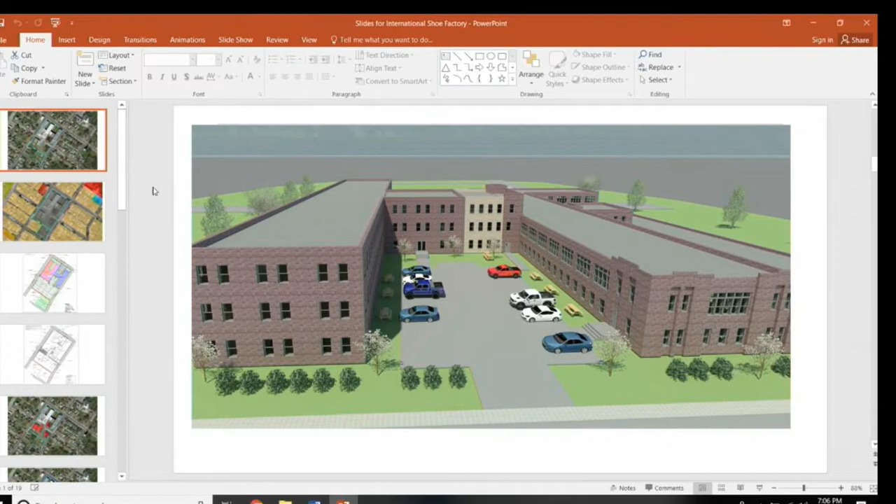I know a lot of you are vaguely familiar with this request now, just because it has gotten a lot of press, and it is a very big project. So this is the rezoning and development plan approval for the International Shoe Factory at 700 West 2nd Street.

It kind of takes up the whole block there in between Rand and Johnson Street and down to Edith. You can see what's not highlighted, 3 homes on that same block, but otherwise it does take up 2 city blocks technically. So the property is still zoned M2 heavy industrial, which has been that way since zoning came into effect, obviously because of the original use.

It has been vacant from what our records can find since 1964. I think the factory closed in '59. They used it for warehousing until about '64, and it's sat vacant ever since.

You can see the surrounding zoning is all R2 overlay, meaning it does allow single and 2-family uses. There is a lot of single-family right around the area, but some of them use it as 2 units as permitted in that zone district, and they are just requesting to rezone these 2 portions.

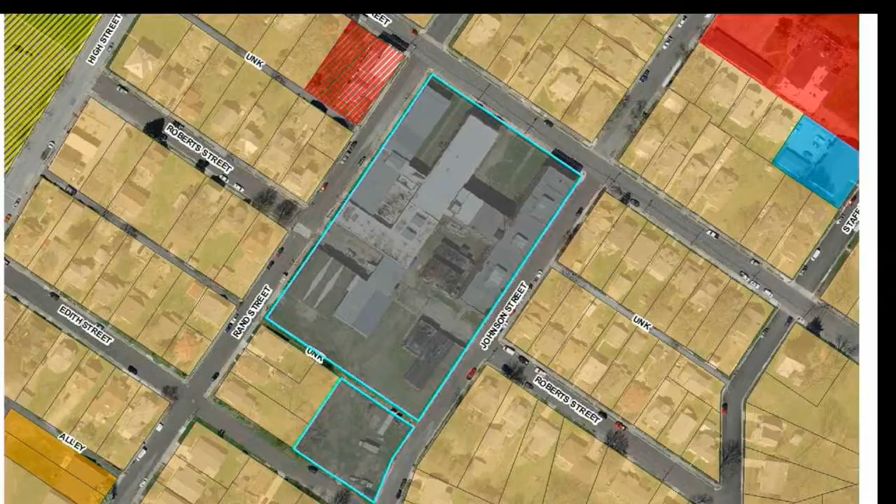It's really meant for properties that are infill, existing buildings that are a little bit more unique. It allows them to say, here's what I'm requesting, and when it gets rezoned, this development plan is approved by ordinance with it. So it's not just a rezoning to a district where they can do whatever is allowed in that district. It's a rezoning to say this is what's being requested and this is what's being approved. It cannot be anything else. And if there are any major changes to that development plan, because it's a planned district, it would have to come back in front of planning, zoning, and city council.

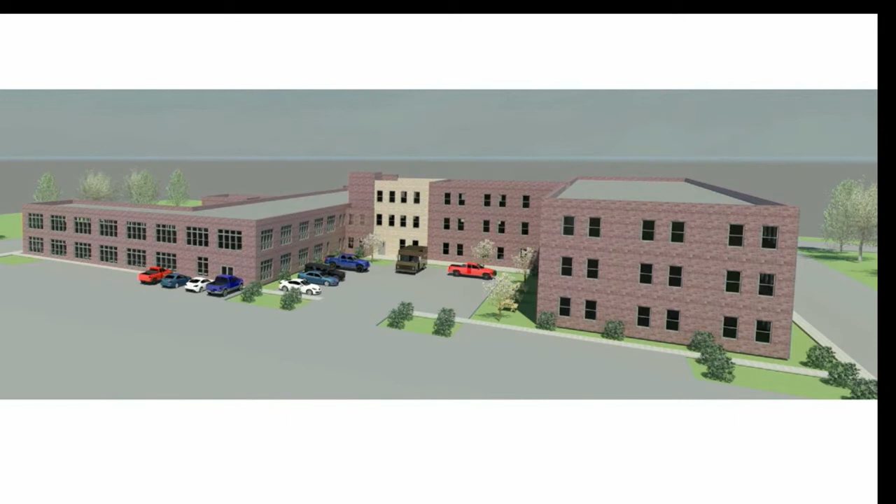Again, just a bird's eye view. This is the back side as well, showing the parking lot and that access. And then this is just a lower level of 2nd and Rand Street, showing that intersection.

There are 3 options shown here that were submitted. We did find out at P&Z that there's going to be a 4th option as well. On the left here, you see 2-bedroom, 2-bath. In the middle is a 1-bedroom, an actual traditional 1-bedroom apartment.

On the right is 2-bedroom, 1-bath. They've ranged from, I believe this is 680 square feet, a little over 1,000, and like 966. There is a 4th rendering that shows, we don't have it in here, but we were told there's also going to be traditional studio apartments, which are a little bit smaller in square footage, but they don't have walls. You walk in, you have your bedroom, living room, everything kind of wide open.

So there will be 4 options, 4 different price points. The applicant did give that information at P&Z. I don't remember off the top of my head, so he'll be able to share the price points on that. To be honest, that doesn't come into our factor with recommending approval or denial, but I'm sure that will be a question that you all or the audience may have, that he did give at Planning and Zoning.

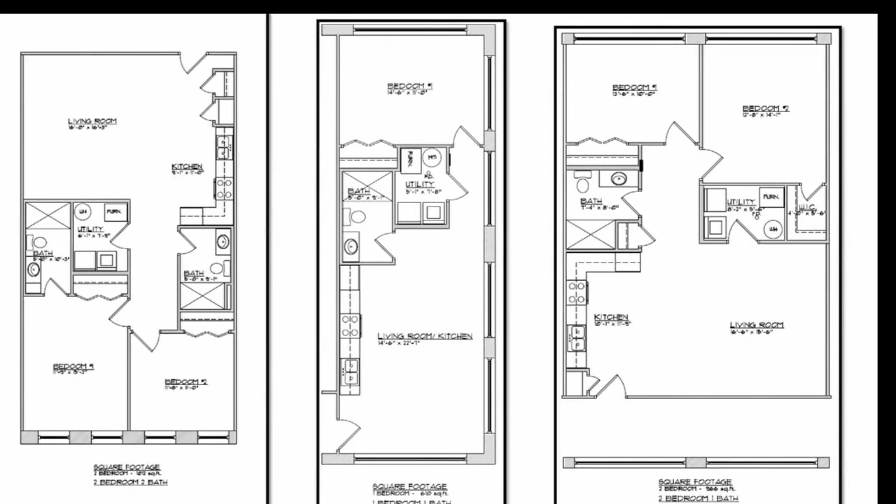So that's really all I have for slides, and I'll kind of get into what I put into my development plan or my staff report.

Like I said, this is required to go to a planned district. If this were to come in just under regular R3, multifamily residential, which is what we require new apartment buildings when they're building out on the highway or building on larger lots, there would have been a handful of things they would have had to meet, not even listing setbacks. Obviously, this building is existing. It's got pretty much a zero lot line, if not close to it, on 3 of the 4 sides of that block. But parking and density were the 2 main reasons.

Whenever the applicant came forward, we said, you're going to have to go to a planned district, which we're going to require up front. For a project this big, we really recommend that anyway. It's more transparent to the neighborhood. They get to see what's going to be coming in rather than just approving an unplanned district. And this is all done in-house. This makes the process a lot more open.

But I'll kind of get into density first. So they're requesting to have 85 units here. In our existing code, if someone were to build new apartments, they would have to be able to prove that on the lot they can have 3,000 square feet per unit, and that is not per apartment size. That's on the lot in its entirety, open space, parking, stormwater, all of that.

And that is a new code, as you all know. We approved that just in 2017. We actually increased the density to try and encourage some more of that development. We hadn't seen new apartments built in a long time, and that was part of our master plan to increase entry-level housing, which obviously has seen us successful with more applications that are meeting those density requirements.

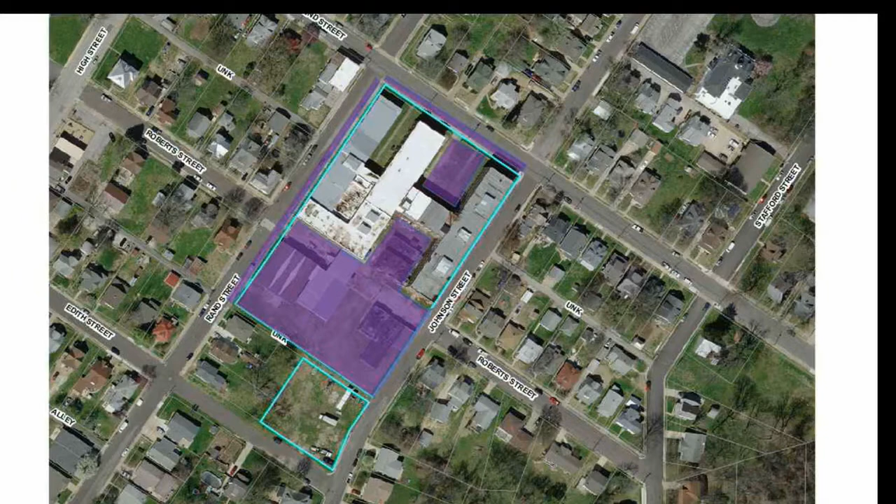That is no matter if it's 1 bedroom, 2 bedroom, or 3 bedroom - they have to have 2 stalls per unit. This proposed development plan is showing 153 parking spaces total. That is 128 off-street as well as 25 on-street striped, like I mentioned, on Rand Street and on 2nd Street. That comes to a ratio of 1.8 per unit.

So that is a little bit below, 10% below the minimum that we would require for a new apartment building. There are a couple things that the applicants submitted and talked about at P&Z and brought into the record as to why they are proposing that this is an adequate parking calculation.

One is that they're going to have 41% of the units be 1 bedroom, and by their calculation, they're saying at least 20% of those are not going to have a car. That factors into the fact that they're not going to have the need for the full 2 parking spaces per unit.

Second, when you have 2 bedroom units, of course you're going to have couples there with 2 cars, but his experience, and he had data from other apartments he's developed, shows you don't often see 100% of the 2-bedroom units even have 2 cars. So even assuming 20% of the 1-bedroom units won't have a car, that's offset by assuming 100% of the 2-bedroom units have 2 cars, which is often not the case.

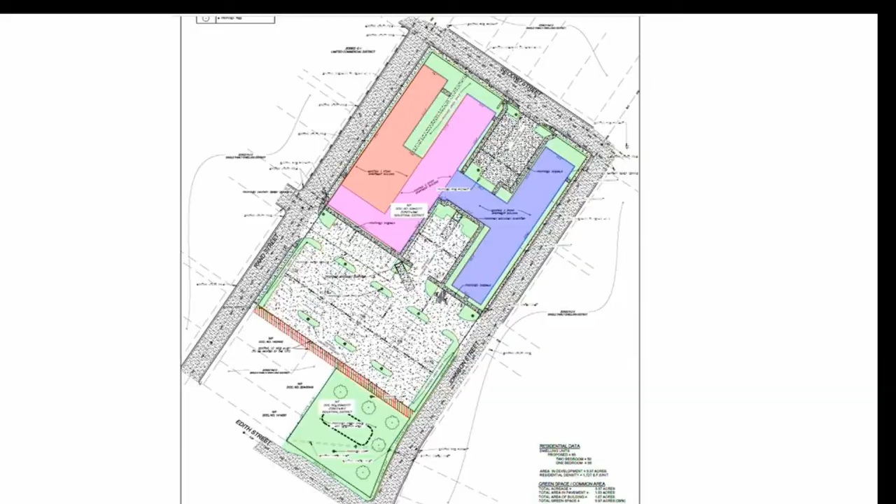Thank you. Any other questions of Ed? Comments? Good luck. Okay, I'm gonna need it. Thank you. Thank you, Ed.

I know, Sarah, you were concerned about parking on Second Street. I know you weren't around back in the day when the place was open, but a lot of these people that live in these houses around that whole block probably weren't around either. I rehabbed the house on Johnson Street, and when I was doing the rehab I would drive around when I left and looked at the parking, because I was worried about parking for whoever I sold the building to, or a place for them to park in the alley. I just don't want my car to get hit.

Well, I'm getting to that. You could talk to any one of the firemen, and they'll talk to you till they're blue or red in the face to tell you there's problems all over Washington with parking on streets. That street is a lot wider than a lot of streets where we have closer parking with fewer accidents. On one hand, I'm getting something fixed up that's going to enhance the property of my house. On the other hand, this might be a burden on my parking, but give it a chance and see how it goes, and I'm sure within the city and the owner it'll all get straightened out.